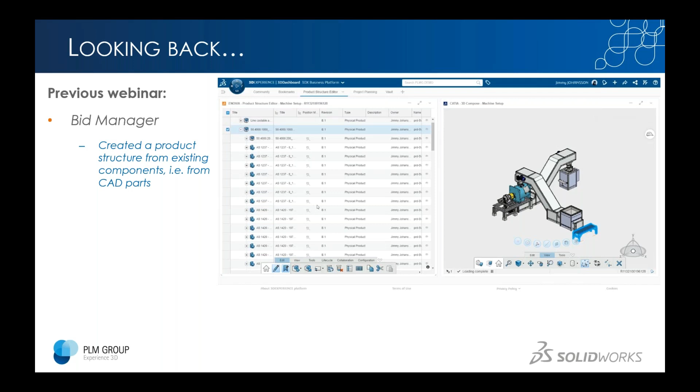This is one of the benefits of the 3DEXPERIENCE platform, because there are many stakeholders in every company, and all stakeholders have different requirements and needs. So what the 3DEXPERIENCE platform does is combine everything that these different stakeholders in the company need into one single system, making it easier for everyone to collaborate and work on the same data.

So 3DEXPERIENCE connects multiple business areas together on a single platform to erase the silos in the organization. This also lowers the administrative burden for IT and administrators, because decreasing the number of different systems requiring updates means you don't have to update many different systems. You have one big system that you only need to update, and those updates are done automatically. And of course, fewer systems mean fewer customized bridges, so to speak, between different systems.

If you have a number of different systems with customized bridges to make them talk to each other, you always have the risk of those bridges not working once you update one system. And of course, fewer systems means fewer systems to administrate. Since 3DEXPERIENCE is cloud-based, it will eliminate or decrease the amount of local servers or local IT infrastructure that you need.

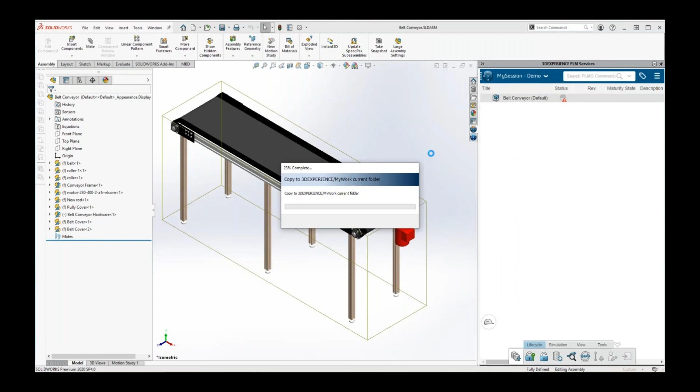So if we start in SolidWorks, we can see that we have one model open and it's currently not yet uploaded to the platform. In order to upload the model, I can simply right-click and select Save with Options. What will happen first is that I copy this file to something known as my local cache, meaning I copy it to a specific folder that will be synchronized to the Cloud Vault, meaning it will be synchronized to the 3DEXPERIENCE platform.

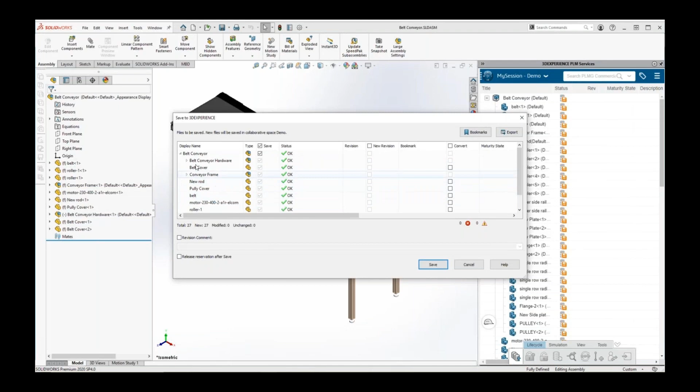So the benefit of this is that instead of sending piece by piece, as you would when working on a regular server, you instead send the entire package, decreasing the risk of corrupt files.

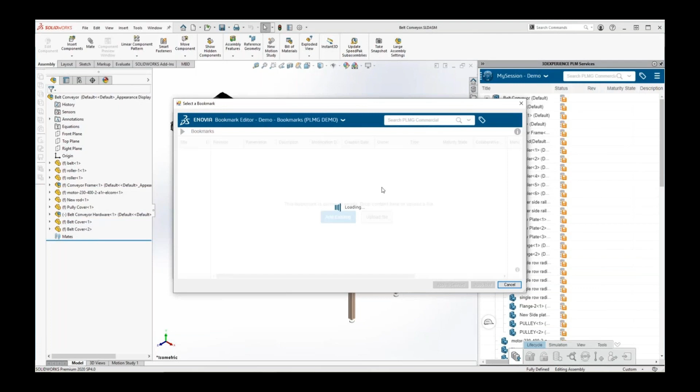As you see, I can also add something known as a bookmark, which is a tag for these different files, making it easier for me to find them on the platform. Currently, I'm selecting the demo, PDM in the cloud, and then CAD files, and applying this bookmark or tag to the top assembly. Then I can select all the subcomponents and add yet another bookmark or tag to these files. So I know this is where I can find the top assembly of the file, and in this tag I can find the components of the top assembly.

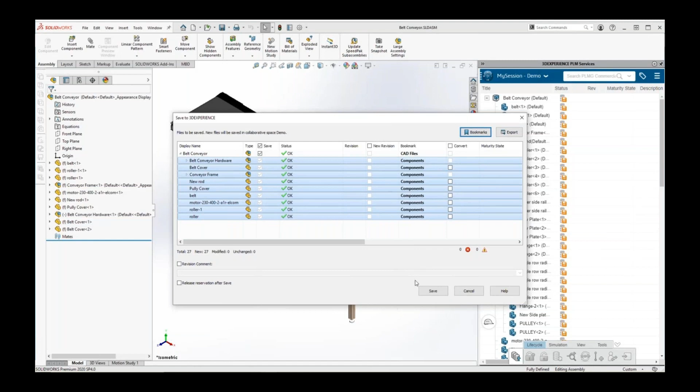So here we can see we have one column called bookmarks, which is essentially tags, and we have CAD file for the belt conveyor and component for the remaining ones. When I click save, the files will be uploaded to the 3DEXPERIENCE platform, meaning they will be duplicated from my local cache up to the cloud so other people can access them as well.

Once they're uploaded to the cloud, I can see in the task pane to the right of my screen, in the add-in for 3DEXPERIENCE, that the status column shows a green checkbox on all components, meaning they are all successfully uploaded to the platform.

So what we just saw was that we can easily add files to the cloud storage, meaning we can easily upload files from our local computer up onto the cloud. And we have organized them using tags, or bookmarks, as it's called.

When I'm navigated to the 3DEXPERIENCE platform in the web browser, I will use different applications, or tools, to do whatever I want to do. If I want to upload or update the revision for a file, I will use one application. If I want to organize the files, I will use another application. If I want to review the files, I will use yet another application.

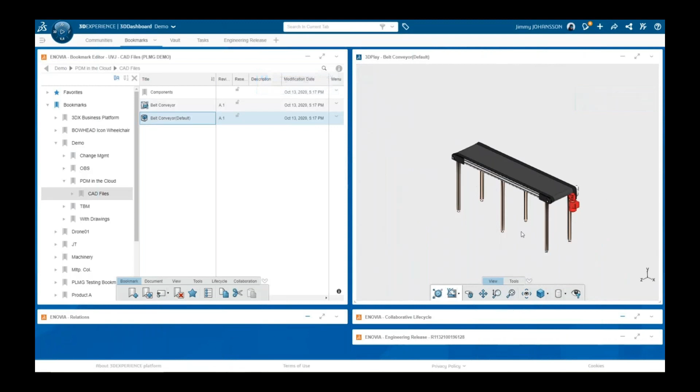So I drag and drop it into the 3D Play application to open and review the CAD file directly in my browser. Here I can rotate the CAD model, zoom in and out, and use different tools to, for example, measure between different points.

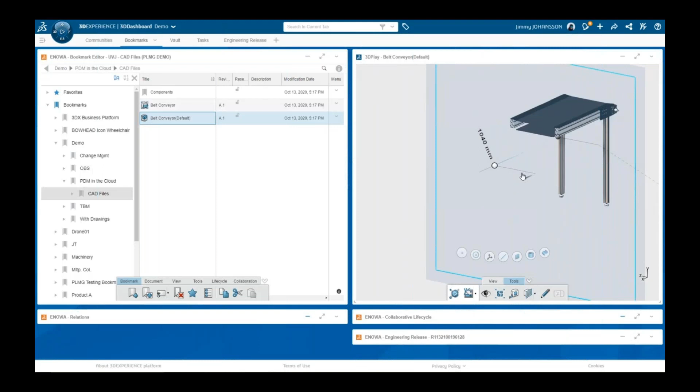And I can erase the measurement if I want to as well. I can also do different cross sections, and depending on what plane I'm using, I get different types of cross section as well, of course.

What's also interesting is that I can create markups directly in this 3D Play application. So I can draw circles, arrows, or lines, and I can also add text associated with these markups, to easily communicate ideas or concepts.

And of course I can share these as well. I can either print a screenshot, save a screenshot of this image, or publish it to something known as 3DSwym. I won't go into 3DSwym today in this webinar, but it's a forum on the 3DEXPERIENCE platform, meaning you can create different forums on the platform.

For example, a forum per unique project. So you could have a forum for this belt conveyor, and publish this markup directly to that forum without having to download the file and then upload it again to the platform.

So what we have seen is that we can add files to the cloud storage, and we have organized them using the Bookmarks Editor with different tags. We have also seen that we can search for content on the platform using the bookmark editor, viewed files directly in the web browser using the 3D Play application, and done some markup of files on the platform.

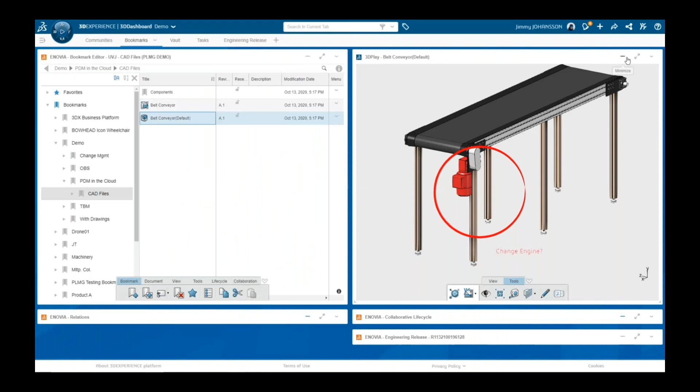So we have a number of different tools on the platform, and we will dive deeper into them. If we go back to the platform, we can minimize the 3D Play application and expand something known as Collaborative Lifecycle, to which I can drag and drop the belt conveyor.

Here we can see that we have revision and maturity state, meaning the status of the file. If I click on release in the upper graph, we can see that I can set the maturity, meaning the status of this file, from in-work to released. So I can easily change the status of files directly on the platform.

It doesn't have to be done through Solidworks. And I can, of course, also update the revision of the file. So when I add a new revision, we can see that the new revision of the file will by default be sent back to the in-work maturity state.

Meaning I have control of revisions and status of my file directly on the platform. I will not have to do it directly from within SolidWorks, but I can work with these files in these ways directly on the 3DEXPERIENCE platform. So what we have seen now is that we can update status for files directly on the platform, and we can of course also update the revision. So as deeper we dive into this, we can see that we have more and more tools for managing your files directly on the platform.

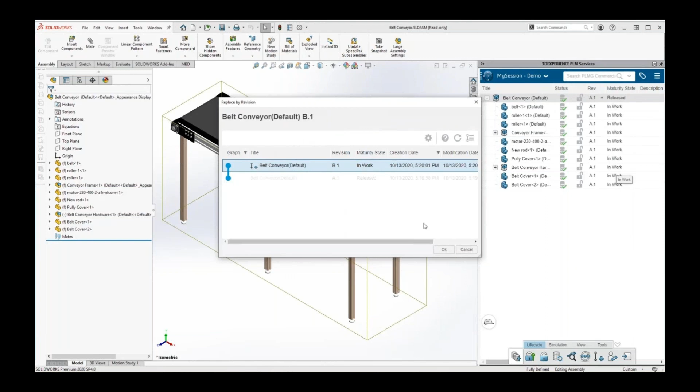So what will happen then in SolidWorks? In SolidWorks, when I update the revision on the platform, we can see that we have one column for revision in SolidWorks. And currently we have a small plus sign right next to the revision for the main belt conveyor, because I updated the revision on the platform for this file, meaning I will now have to right click on the belt conveyor and replace by revision in order to download the latest revision of this conveyor from the cloud platform into my local cache, so I have the latest version locally.

And there we can see that it's updated with revision B1. So I simply, by a mouse click, downloaded the latest version to my local cache. So besides updating the status and revision on the platform, we can do it directly from within SolidWorks as well. And we have a live connection between the CAD data on your local computer and the CAD data on the cloud.

So moving on, let's see how we can collaborate a bit more efficiently on the platform as well. You have a tool on the platform known as tasks, meaning that you can create tasks directly from the platform, from the cloud environment. And you can, of course, tie these tasks to a project plan if you want to. So let's say we create a new task called Change Engine, for example. And we can refresh the session. We can see that we have a task called Change Engine.

If we click on that one, we can access more information for this specific task, where we can add a description, estimated finish date, assignees, etc. And here we can assign a number of different people.

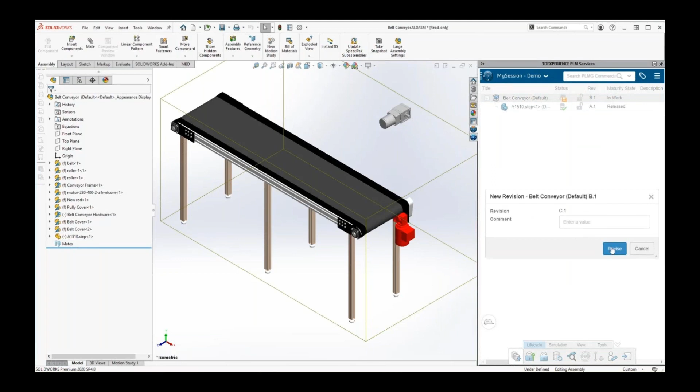So right-clicking and selecting the maturity, we can see that I get the same graph I got on the platform. Or if I right-click and select revision, I can update the revision directly from within SolidWorks as well, meaning I will not necessarily have to go to the platform in order to update the status or the revision of the file. So many of the tools, as I mentioned previously, are accessible directly from the platform. So we have seen how we can reserve files for editing and design your CAD data. And we've also looked at how you can actually access even more tools directly from within SolidWorks.

So this is one of the huge benefits of the 3DEXPERIENCE platform, that you can access and work with a lot of different tools directly through the cloud on the platform, but you can also access and use a number of these tools directly from within SolidWorks. So you might sometimes not even have to go outside of SolidWorks in order to do your tasks. And I believe this is one of the strong features of 3DEXPERIENCE, that you have access to tools wherever you are.

So what's also quite interesting on the 3DEXPERIENCE platform is that you can build your own product structures as well. A product structure might not necessarily be tied to only CAD data, but you can, of course, use documents, rendered images, Word documents, etc., to attach to your product structure. So your product structure could consist of requirement specifications, CAD data, rendered images, etc. And then you want a nice structure to review your entire product with all the associated information. On the 3DEXPERIENCE platform, you have a tool to achieve just this.